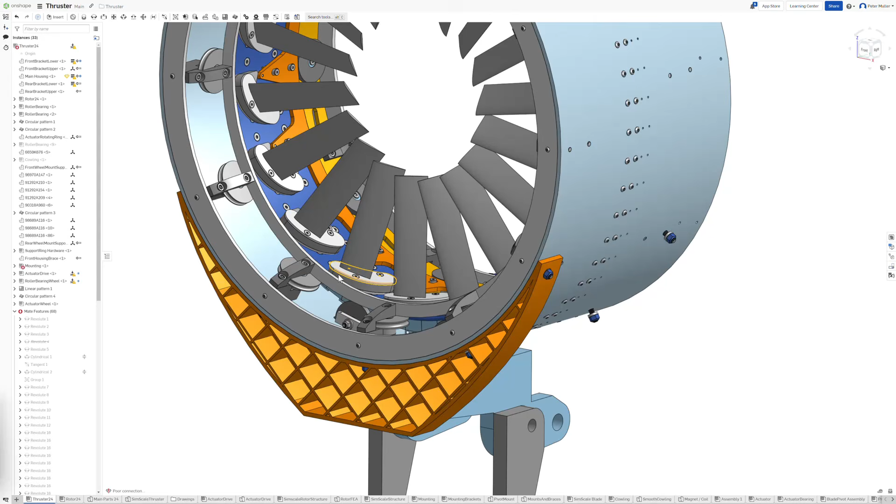This is how it looks with the cowling hidden, to give you the basics of how it works. This blue or purple part is the rotor, made of 1/4 inch thick aluminum, riding on these wheels. There's a dozen wheels around the front and 9 around the back, each with a bearing on either side, an upper one and a lower one, taking all the driving load from the rotor itself.

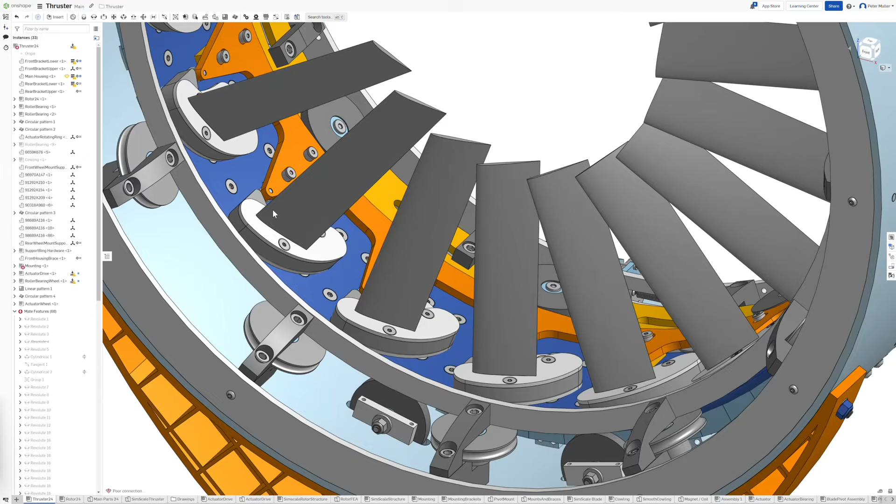Mounted to the rotor, each of the blades has a bracket it sits on, and they can pivot on that, which I'll show you in a minute. On the back side, there are other wheels that the rotor runs on, and also other fittings or brackets that allow the blades to be adjusted, which I'll also show you.

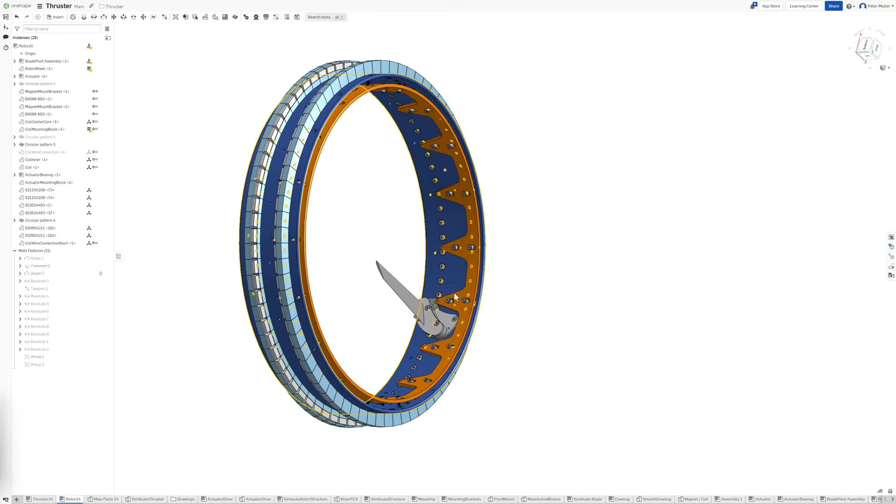So here's the rotor, and this is everything that's spinning. I've hidden most of the blades to show you this one actuating. But before that, on the outside, you'll see the way I designed this, and this may not be ideal since I didn't know a lot at the time about the best way to configure an electric motor.

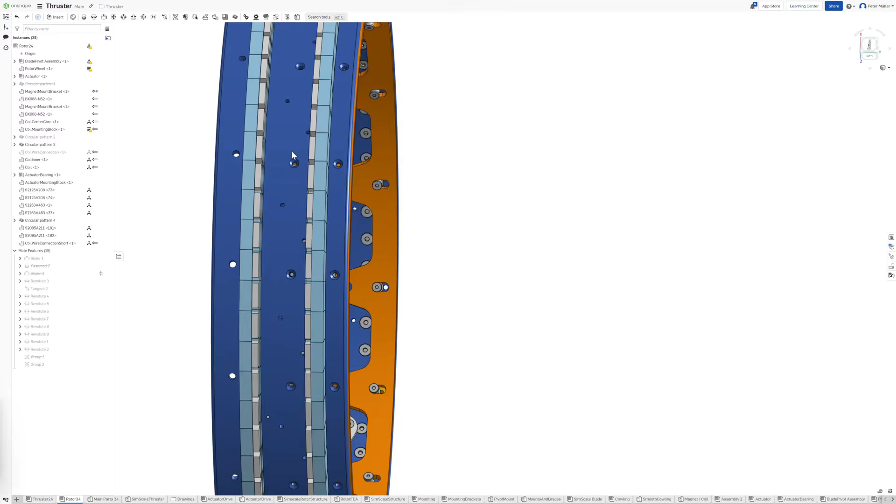These are all the magnets, alternating north-south facing inwards, with 72 on either side, so 144 magnets total. The blue thing is the bracket, and the silver one is the actual magnet itself, and the coils run in between that.

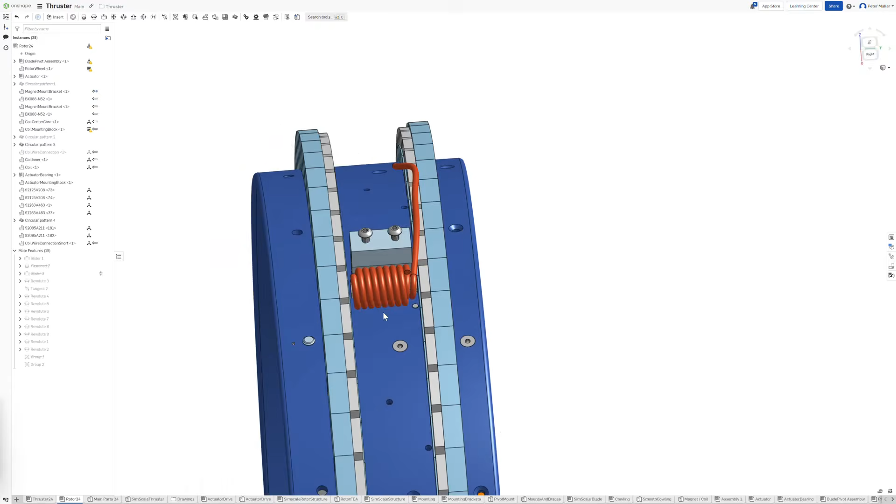Just to give you an idea, here's one of the coils with the bracket that mounts it to the housing, which doesn't rotate, it just sits still in the housing. There's a tight clearance there, and a little soft iron core for the electromagnet. It's just a 3-phase motor setup, with every third one being on the same phase.

So how the blade actuation works for the pitch adjustment: you'll see this orange bracket here which is running on bronze bearings, so it can slide. When it slides forwards like this, it actuates the blade, and when you slide it backwards it comes back.

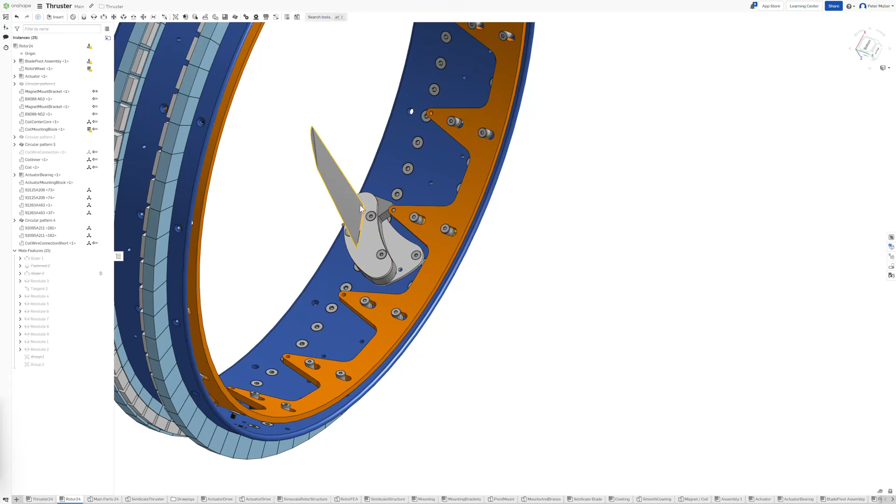Normally the blade rotates on a bearing, quite a large flat bearing underneath here, in line with the leading edge of the blade, so it rotates around the leading edge. There's a little roller bearing on the back to allow this to roll on that flat surface.

So again, if I actuate this, you'll see that's how we get the blades to move. To actuate them you're pushing pressure here, but it's the aerodynamic force on the blade when it's running that's going to pull it back to the flat pitch.

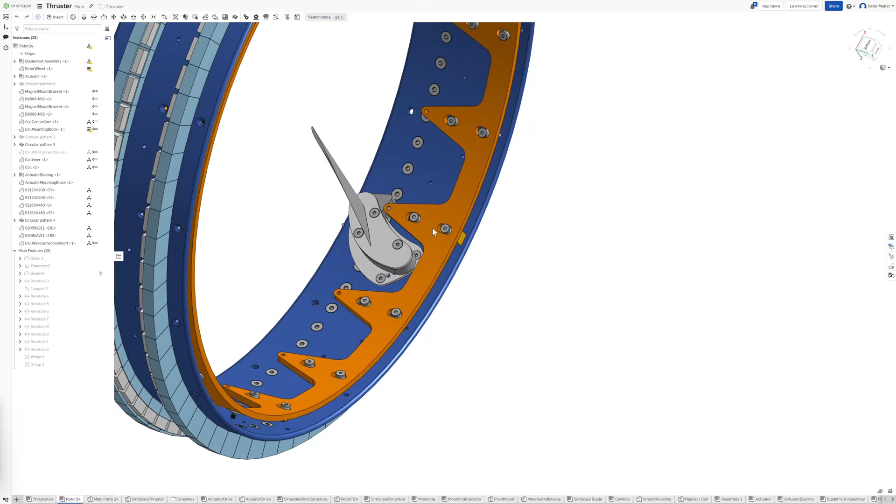So this is just to hold it in place. When you let go of this, it'll want to flatten out just because of the aerodynamic force on it and where the center of pivot is on the leading edge there. I've got 25 degrees of adjustment in there right now.

And then this orange thing here is actuated by this other ring that's on the main housing, and I'll go back and show you that here shortly.

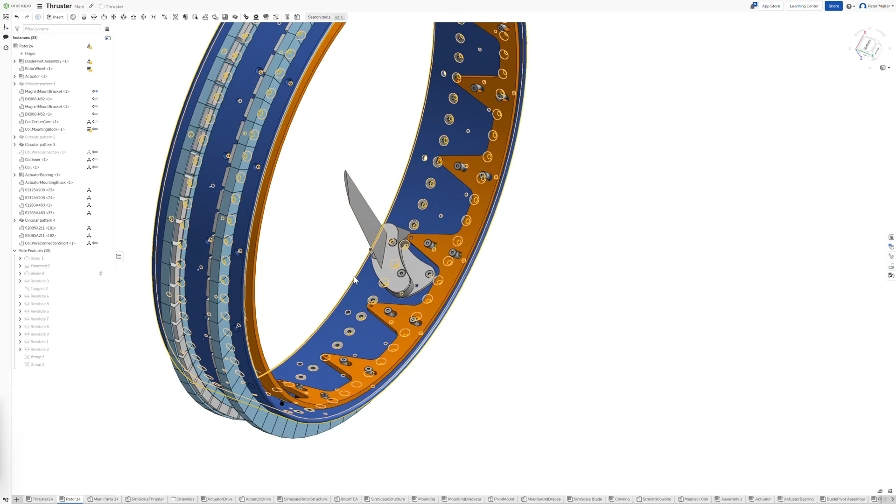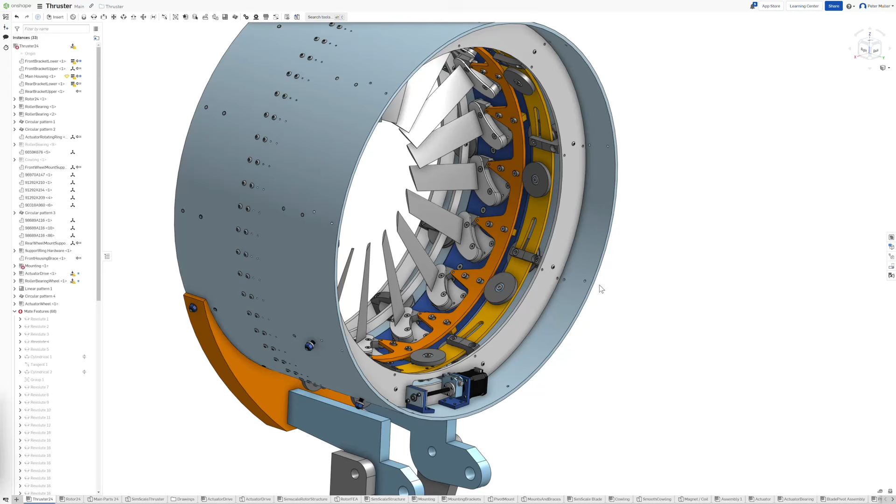Something you may have picked up already is that given the coils and magnets are on the outer side of the whole rotor, they have quite a long arm length from the center of rotation, about 13 inches of radius. So the torque available will be really quite high on this setup because of that arm length, and because an electric motor has a lot of torque by its own nature. So that's definitely a plus.

Let me show you how the blades get actuated here. You have this other outer ring, basically slotted, and the slots run on an angle. It has wheels on it with a flat edge, and they ride up against the flat edge of this orange one here.

So while that rotor is spinning, these wheels are turning and running against the orange one. In order to get that orange bracket on the rotor to push forward, this one just rotates. If I move it, you'll see as it rotates, it moves forward.

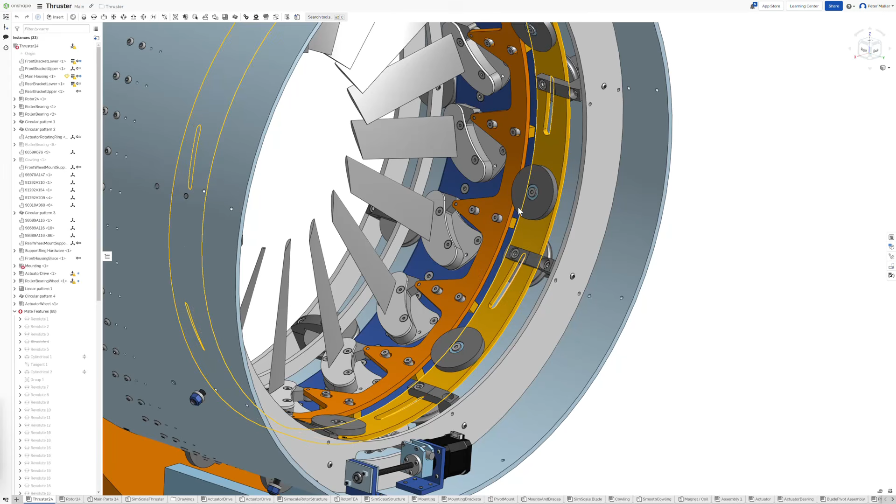Because of the way I've got the animation set up, it's not pushing the orange bracket right now, but you can see how the wheels are overlapping now where it would be. If I move it back, you'll see how it comes back again. So that's how that works in order to get the blades to change pitch.

In order to actuate that, right now for the design I just have a lead screw in here, and that pushes along, controlled by a regular stepper motor. That runs this rod, pushes it along, and that rod is hard fixed to the light orange-yellow one there, which allows it to rotate.

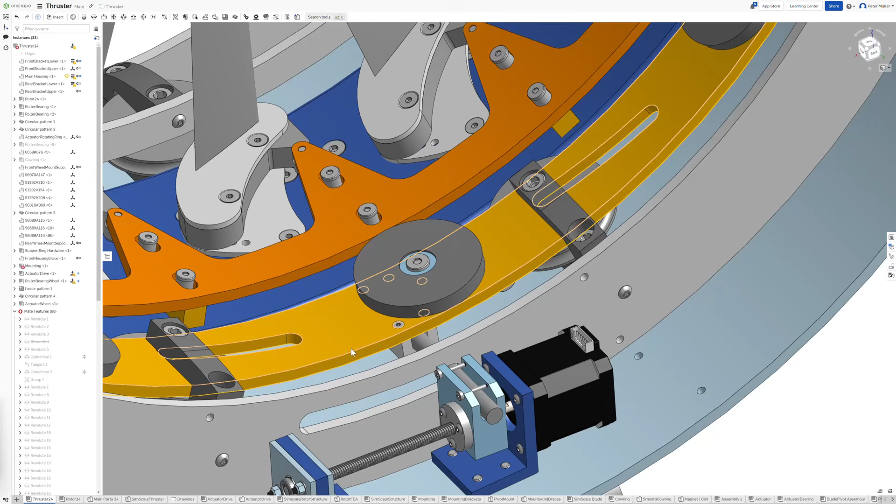So that's how you get the pitch adjustment. The pitch adjustment on the blades would be fully automated and just controlled electronically.

It would work in that if the motor is spinning too quickly with not enough load, it would basically coarsen up the blades to add more pitch. If it's struggling or laboring under whatever it's trying to do, it would flatten them out again, very much the same way as a governor works on a constant speed propeller. So that's how that system all sets up.

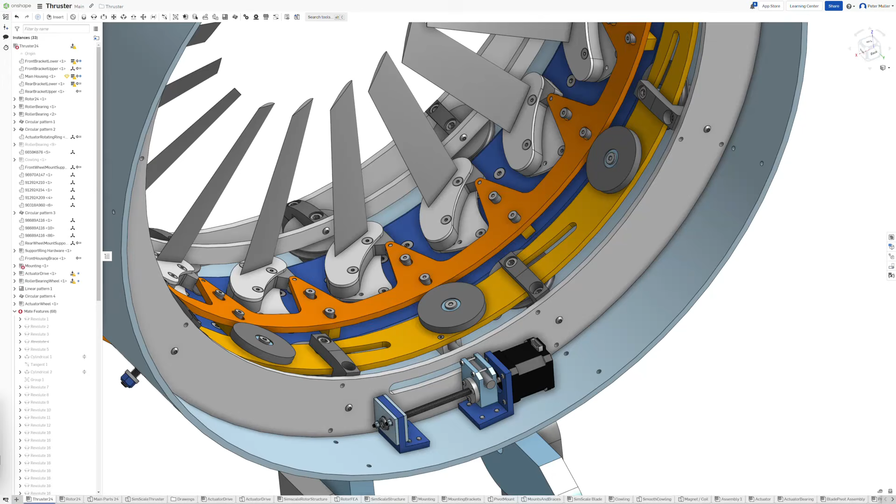So unlike regular ducted fan motors that exist, because this has variable pitch blades, it's not going to have the same problem of running out of steam at fast incoming air speeds or fast cruising speeds. The blades can adjust further, and if needed we could actually take this beyond 25 degrees, but I think that'll probably be enough.

Let me tell you some of the other advantages of this design. Having the blades mounted on the outside of the rotor gives you the advantage that nothing is under tension, everything is under compression. So when those blades are spinning, they're all wanting to be pushed down into the rotor. It's unlikely that one of them is going to come loose or come free because of that, which is an advantage.

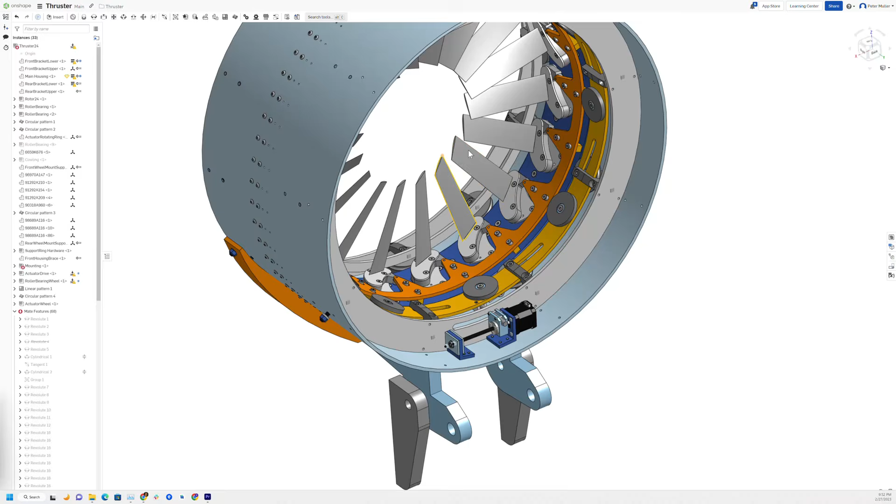The advantage of this system, as I mentioned earlier, over a turbofan is that you can adjust the blade angle. On a turbofan, the blade pitches are set for their maximum cruise, and you don't have that ability to adjust them dynamically. We also don't need to be concerned with blade tip speeds, because the tips are so close to the center, they're not moving very fast at all.

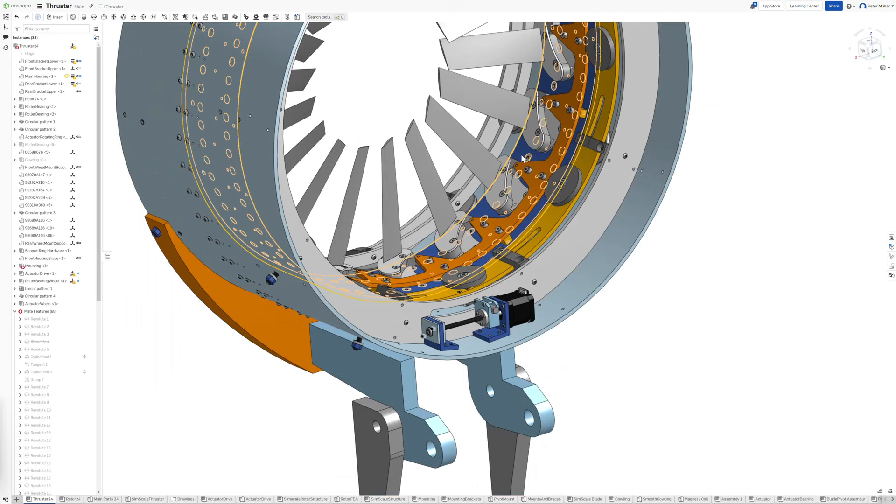And that's why, as I said earlier, this thing is designed to run at 5,600 RPM. If you could get bearings that are inside those wheels there that the rotors are running on to handle the faster speeds, you'd be able to run this thing up to like 8,000 RPM. Of course, there'd be a lot more loads and stuff, and the FEA that I did for the prototype was all done for 5,600 RPM.

When I did all the CFD modeling and stuff, I actually took this up and ran some CFD simulations all the way up to a 96-inch diameter, and I'll give you some numbers on that a little bit later. But yeah, as you can see, there's no reason why this wouldn't scale up to a much larger diameter.

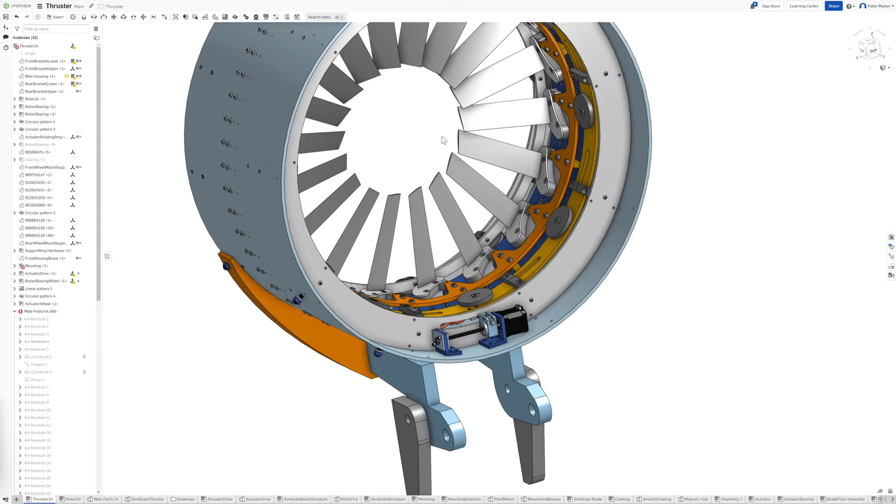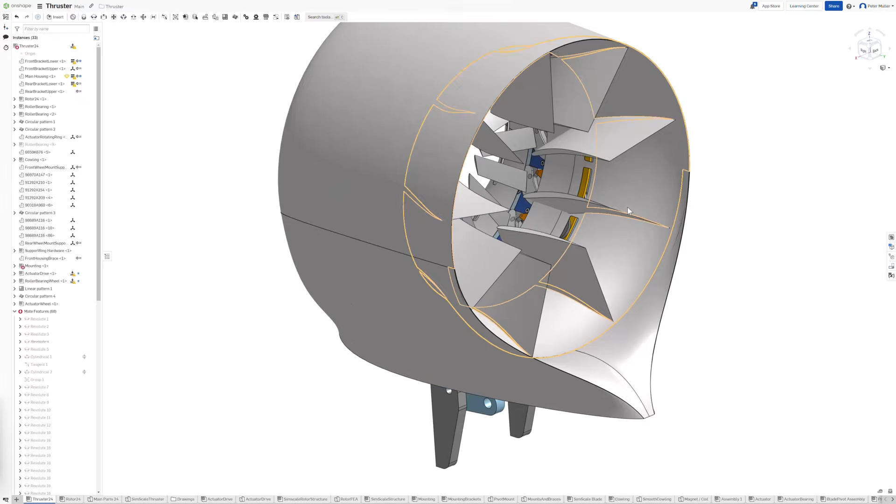With the cowling visible again, I just want to point out a couple of other things. The stator is in here. As you can see at the back, there's 9 of these stators, and their job is to take the swirling air that's coming off the back of the blades and straighten it back out again, so it comes out the back in the same angle as the direction of travel. You can see I've set them up as an airfoil, and you'll see later in the simulation that they actually generate forward thrust.

The camber of that airfoil has enough there that when the air's running over the top of it, and because it's also pitched downward relative to the direction of motion, there's a component of lift that acts in the forward direction and actually provides forward thrust for the whole thruster. They actually contribute about 15% of the total thrust, just having those in there.

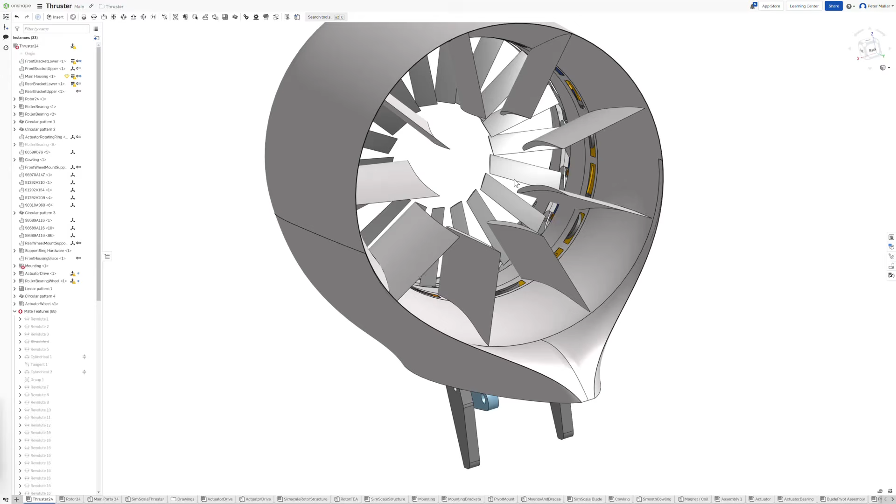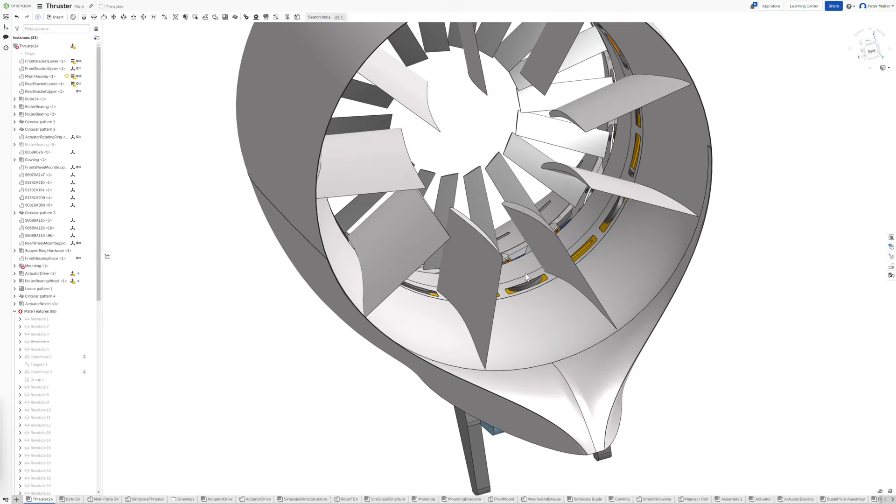I spent quite a lot of time going through different iterations of the size of those, the chord lengths, and the foil shape to match them up to what the flow was coming off there. You can also see you've got ventilation in the cowling here, and that's to allow air to run in past the coils to keep them cool. It runs in through these slots at the front, underneath the rotor past the coils, and then back out the other side. So that's how that works.

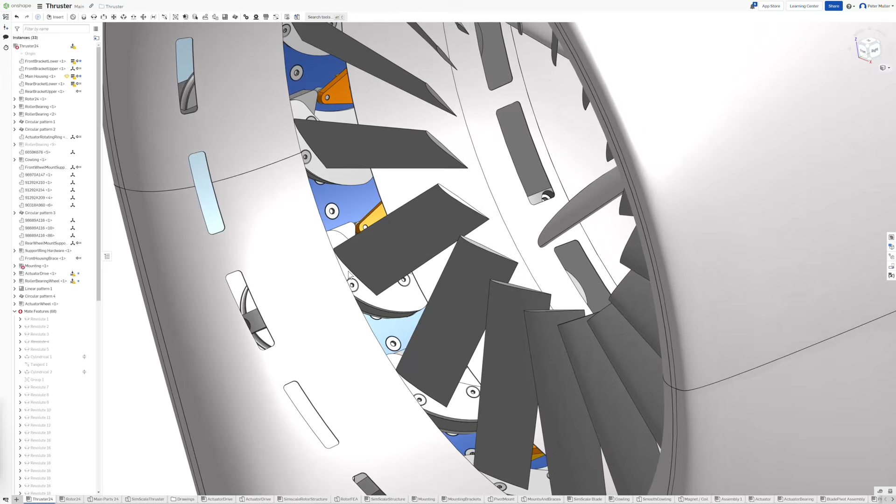One of the other advantages of this design is that if for some reason you did bend or break a blade during a trip, it would be easy enough to come in here. I've designed it so these screws all have a hex head bolt on them - you just take those 3 screws out, the blade rotates a little bit, and you can just pull it out and hot swap it with a new one. So you don't have to do a full disassembly if you've damaged a blade. It's actually like a 5-minute job to do that.

There's a couple other things I'd like to point out before we move on. One of the big advantages of this being electric is that unlike a turbofan, it's not pouring a whole bunch of waste heat out the back from burning jet fuel. So much of it just ends up getting converted into heat and blown out the back, which is such a waste of energy. So this definitely has an advantage over that setup.

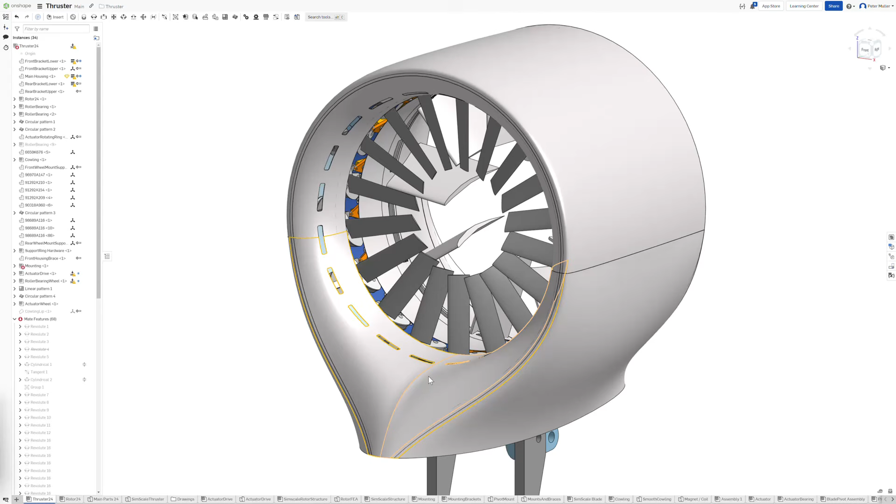Last thing I wanted to point out - anybody who's looking at this who's really astute about aerodynamics would realize that this isn't a good design for where the cowling meets up to whatever surface this is mounted to.

I ended up just trying this because it looked kind of cool. But what happened was the airflow is accelerated right in front of the lower blades, which creates a pressure differential, with a lot more pressure on the blades there than up the top.

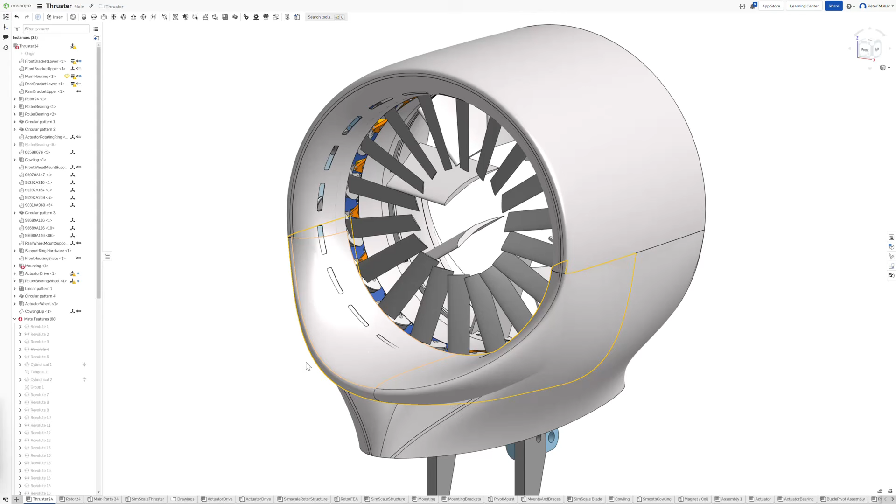So I added a lip, which hasn't been finished yet, similar to what most other turbofans have. This way the air coming in would be even pressure all the way around, and any accelerated air coming off a wing or wherever this was mounted would just go around below it. I did some CFD modeling on that, and it moves the air pretty smoothly, giving a nice even flow.

It looks kind of different, but as I said, it hasn't been blended in yet—it's just a surface I created there. So that fixes that potential issue ahead of time.

Before I show you how I did the CFD modeling in SimScale, I want to show you the model I exported out of here, which was before I did all the detailed mechanical design. So it's a much simpler model, with basically all the aerodynamic surfaces in it.

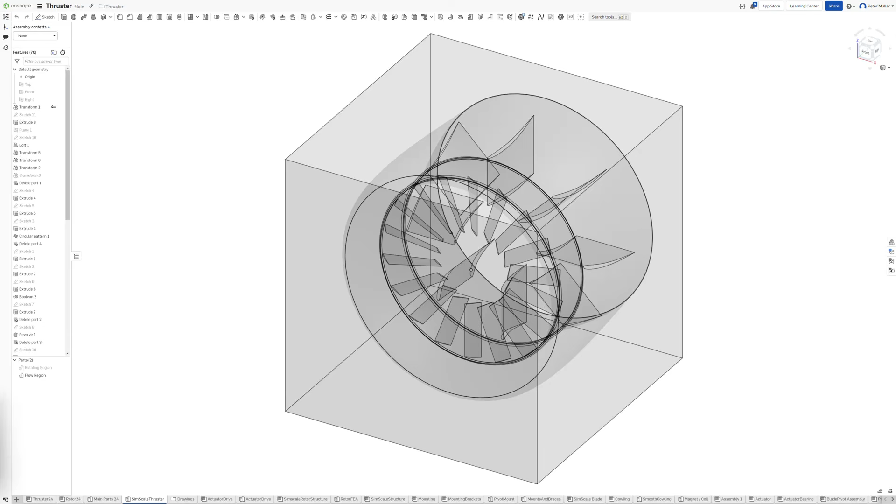I've got it translucent right now so you can see all the parts that make it up. But basically, importing into SimScale, you import a solid block that has cavities where everything is. So if I make this solid again and do a cut here, a section view, you'll be able to see how it's working.

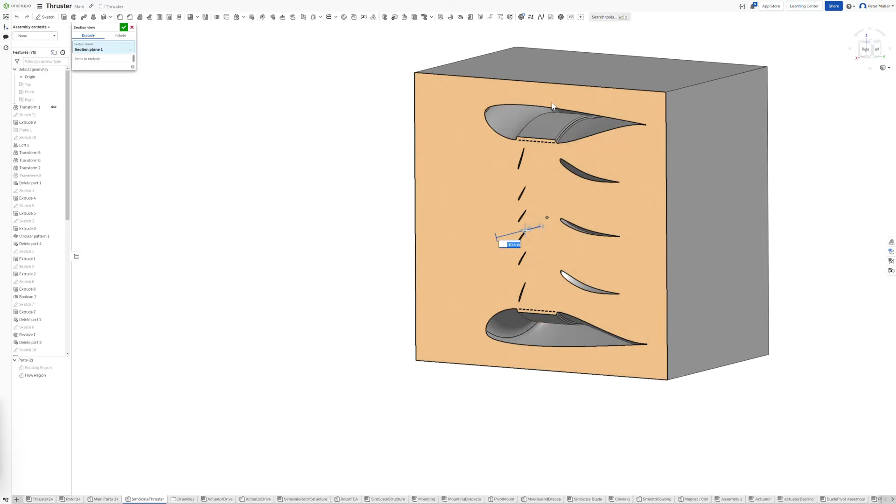Now we're looking into the inside of the cowling, and the yellow hashed area is solid material. As we go through, you can see the profile of the cowling, then the stators as they're cut, and then each of the blades as I move the cutaway all the way around the model. That's how you import it.

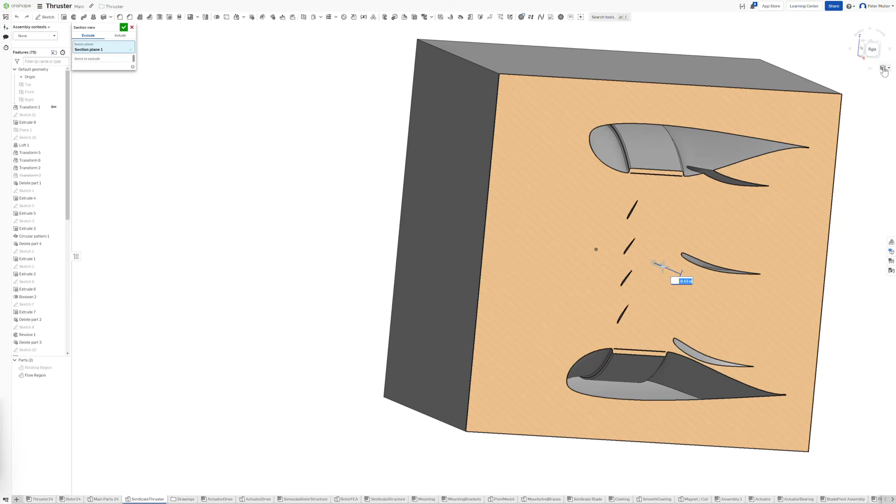There's also a section in here which is a rotating section, encompassing where the blades are moving. I did one of these for this model, and also one for a two-bladed propeller, an 82-inch blade propeller, just to get a baseline.

I'll make this model available to other people, so if they want to run their own simulations to see what results or performance they can get out of it, they're more than welcome to do that.

The first thing I did in SimScale was establish a baseline just to make sure it was giving me reasonable results. This particular model has a two-bladed propeller at 82 inches.

Unfortunately, all the simulations I ran, almost two years ago now, magically disappeared out of my SimScale account only a couple weeks ago. So I've had to rerun some of the stuff, and I haven't been able to get this propeller one to come up with exactly the same numbers as before.

But the numbers I got before were 979 pounds of thrust for 195 horsepower, with an 82-inch prop—sort of like an older 182 with a two-bladed prop, somewhere in that category.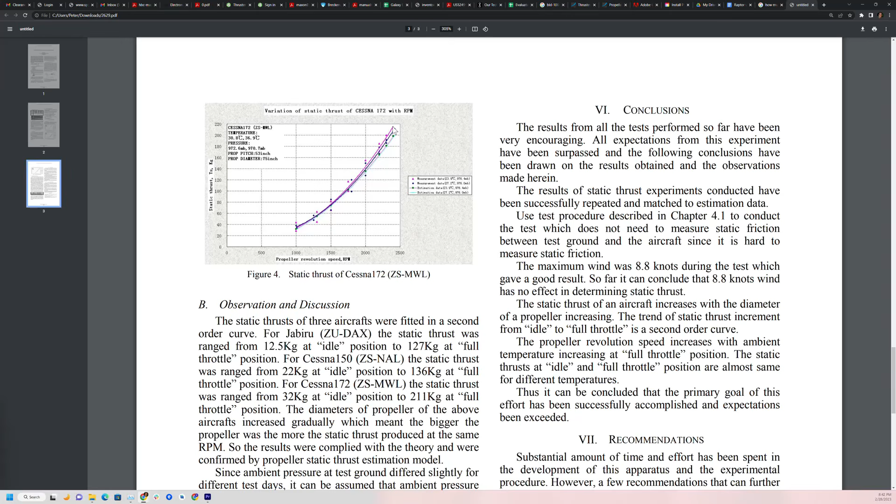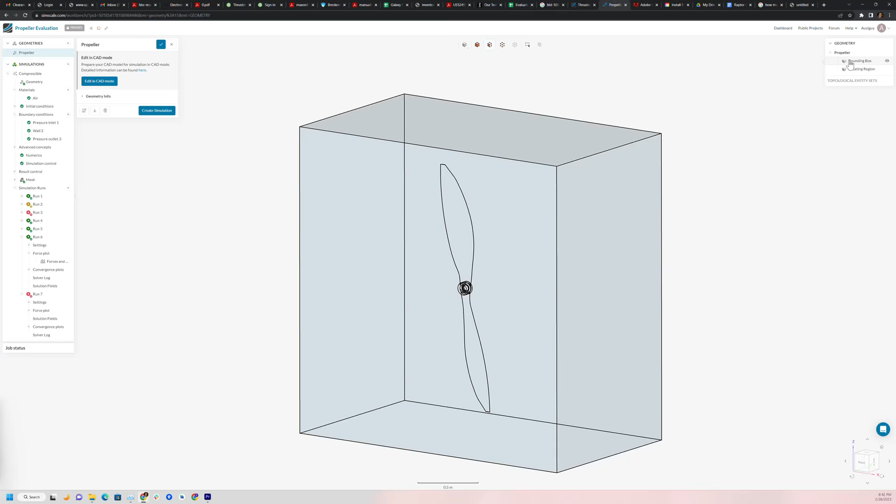When I did this propeller simulation, I was running at 2800 RPM, really pushing it. I remember when I did the Raptor, which had around 320 horsepower with a 5-bladed prop, I measured 1,000 pounds of thrust. So I think 900 pounds of thrust here at 200 horsepower is probably reasonable as a baseline.

But anyway, that's what the CFD was showing, and you can actually look at these runs here. If I show you this, you can see this black line here is the amount of force, which is the propulsion force—in other words, the air being pushed backwards. That's 3,000 newtons, and down here on this line is the torque, so that's 577 newton meters of torque. I've put all this into a spreadsheet and done all the calculations.

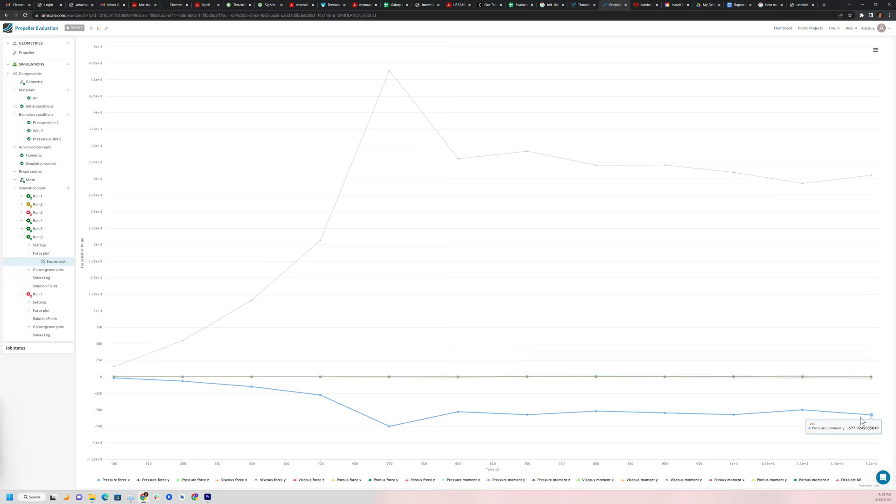I can show you a little bit up in here how I've been doing it all, basically just to do my comparison. So this is the one that I had before here, 979 for the two-bladed prop and 195 horsepower. Anyway, so let's move on and look at how I did the thruster here.

So here's the thruster model, and as you can see, like I just showed you before in Onshape, there's the rotating region in there which just encompasses where the blades are. So you import that into SimScale here, and then you go and create your simulation here.

So I'm doing a compressible simulation. I select my geometry, which is this one that we're looking at here. And then you specify what your materials are, which is basically air. You can set your initial conditions, and I really don't do much of that—I just set everything to standard.

And then you can define your pressure inlet area, and there's different ways of doing this, but I've done it with a pressure inlet on the front, a pressure outlet on the back, and then walls around the side. And that's how I'm defining the working box that everything's working in.

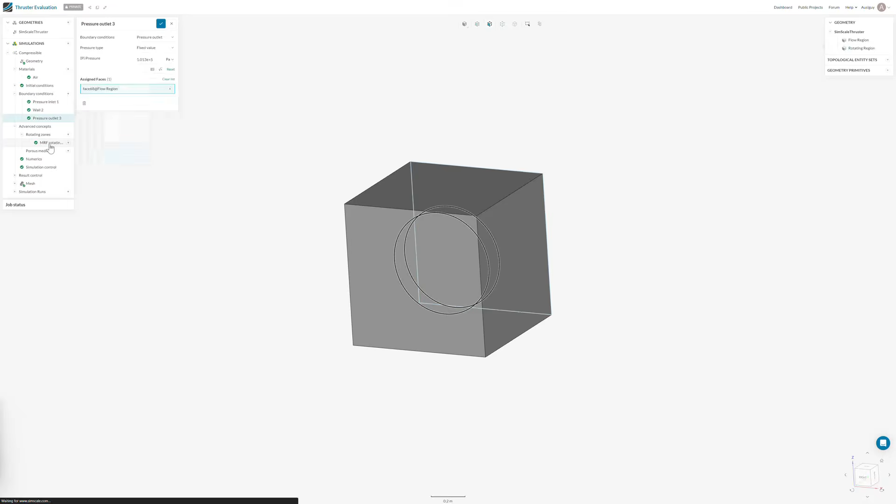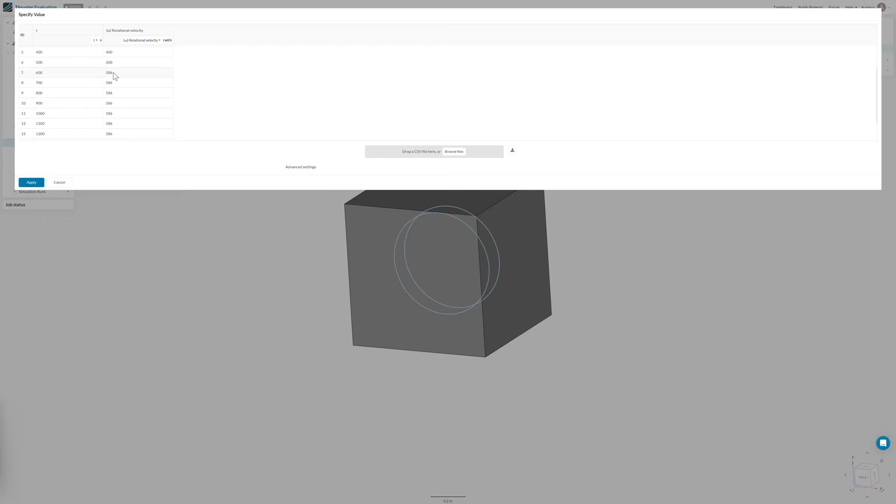And then you've got this rotating region in here which you define, which basically looks at the geometry of the blades and sets those to rotating. I've got those rotating on a scale here so that we iterate through 1500 time units, and I have it starting out at 0 radians a second, and it works up to 586 radians a second, which is 5600 RPM. So it progressively goes up to that, and then it sits there from time unit number 600 all the way through to 1500, so it can stabilize.

And then you can specify details in the simulation, how many time units and how often you write the data, the results and stuff. And then I've got in here the last thing, specifying the forces and moments on each of the blades there, the stators, and also on the housing. And you run your simulation and then you get your results out here.

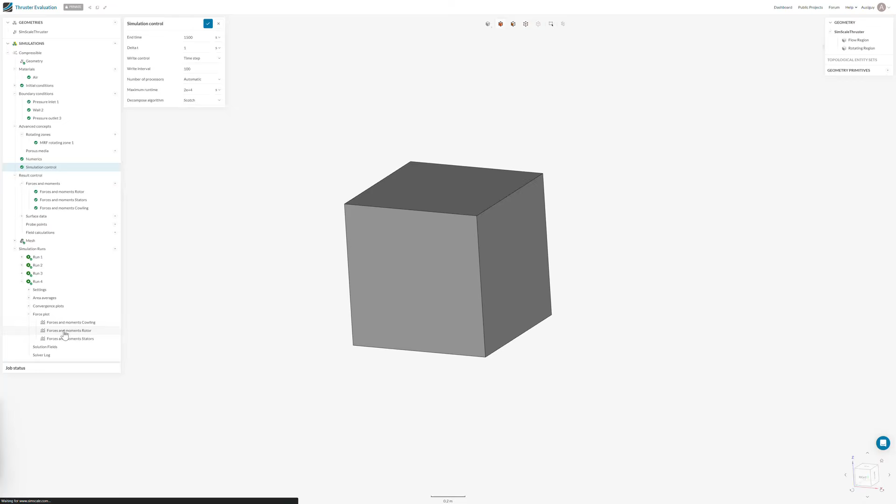So if I open up these, I can look at the force plots here. Starting out here, this would be the forces on the rotor. You see we're negative here just because of the orientation of it. So basically, as it's starting up, it's creating quite a lot of force on the blades themselves. And then once it hits the peak RPM, it sort of stabilizes there and gets to a point where it's just going to be comfortable. So we got 574 newtons there, and the torque on there was 79 newton meters.

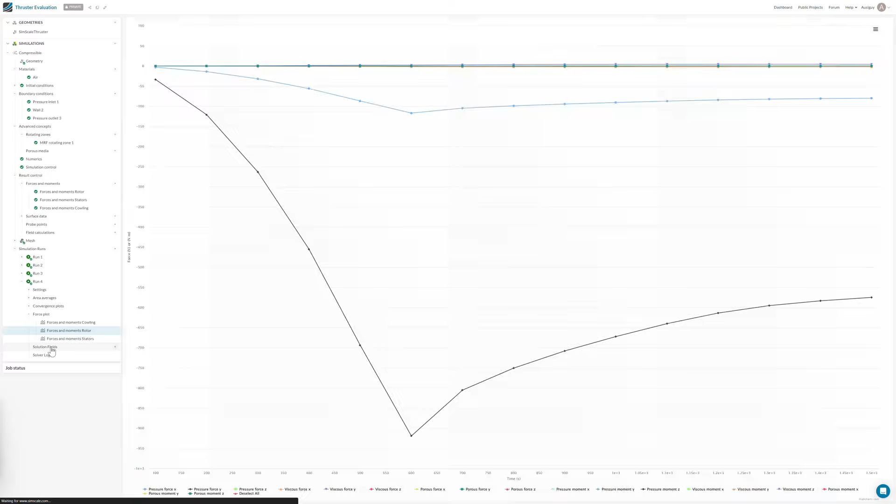So this is how I'm getting the numbers for the torque, but in order to get the numbers for how much flow there is, I look at the solution fields here. So I'll come back, let this load up, and then I'll come back and show you how it all looks.

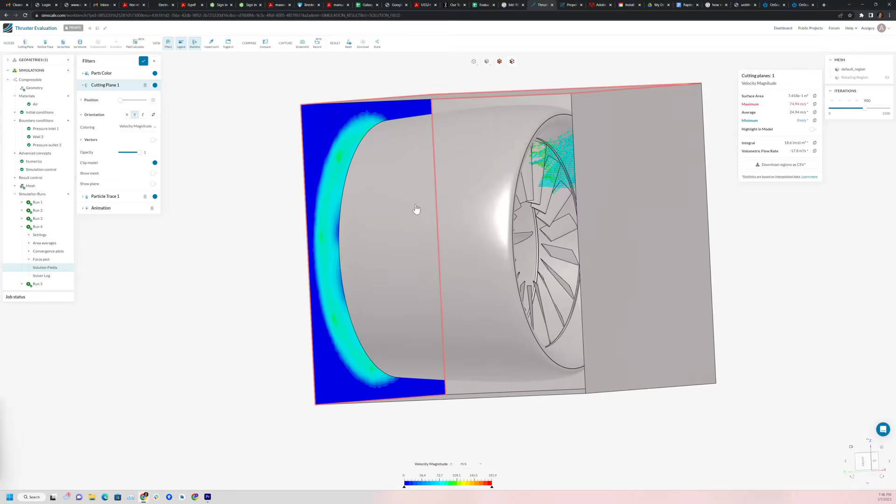So as I mentioned, I haven't been able to come up with exactly the same simulation numbers as before, but I'm pretty close—I just can't remember exactly what specific settings I had last time. When I'd originally done all this a couple of years ago, I actually ended up doing about 167, or 164, simulations on this, iterations where I was just changing one thing at a time, and if it made an improvement, I kept it, and if it didn't, I reversed it and moved on to the next aspect. So that's what gave me all the decisions on how many blades and lengths of blades, chord lengths, and all the different angles and perspectives, and things like the stators and the cowling shape. That's how I basically came to the results that I've got now.

So looking at this now, this is basically the box that we're in, and I've got the front side of it hidden, or the front wall hidden, so you can see in there. I'm going to change it a little bit in a second so you can see more about what's going on. But I wanted to show you how on the back side here, I've got this one face selected.

Over here I can get what the volumetric flow rate is, so 17.8 cubic meters per second, and I've got that put in my spreadsheet. This is a new run here, 17.8. Before, when I did it, I had 18.6, not far off, but that 18.6 was 114 newton meters of torque, and now I'm only at 79 newton meters of torque.

This is the amount of pressure that's on the blades. I have a feeling that because of the way this works with the entrainment, with the hole in the middle, you're getting a free ride with a lot of the air going through the middle there. It doesn't have to actually touch the blades, so you're not putting force and pressure against them, but you are getting flow rate because of it, since it acts like a drain with the entrainment effect. Anyway, the numbers come fairly close here.

I had 1575 pounds of thrust before for 90 horsepower. If you compare that to what I had on the two-bladed prop, 979 pounds with 195 horsepower, and take those two ratios, one over the other times one over the other, you end up with this number. So the performance on the thruster is about 3.5 times what it is for the two-bladed propeller in terms of how much thrust it does for how much horsepower or torque is required, given that the RPMs are a lot higher.

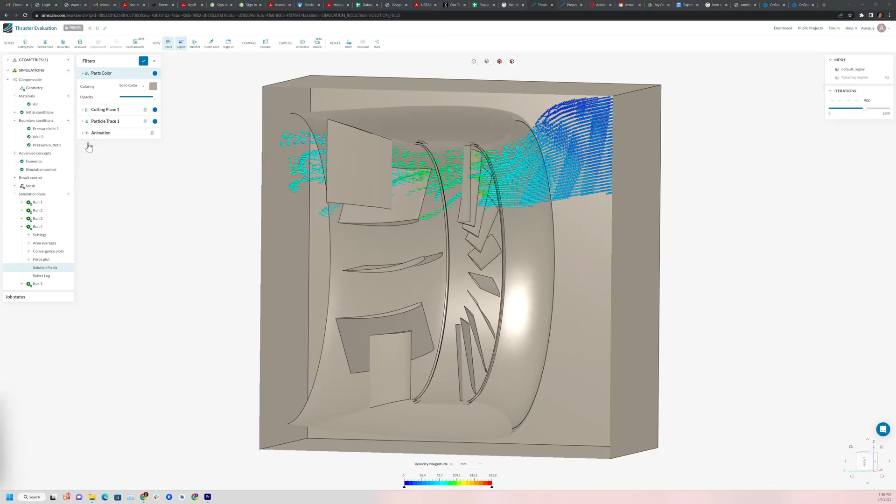So let me show you this animation here. This is basically particles, and I've got them starting out in this one section of the front of the box here, and then they're just running through, showing you the velocity of the flow running through the thruster.

So you can see they're coming in, and the way I've got that face set up is just pressure input, so just atmospheric pressure, and the movement here is all being instigated by the suction effect of the thruster. So that air would normally be moving at 0 when it starts out.

In fact, you can go and change this back to the starting point of the simulation at 0, and we should see that update. So there's the flow just starting out as it's starting to work up to the first speed. That's at 0 when we haven't even got any speed yet.

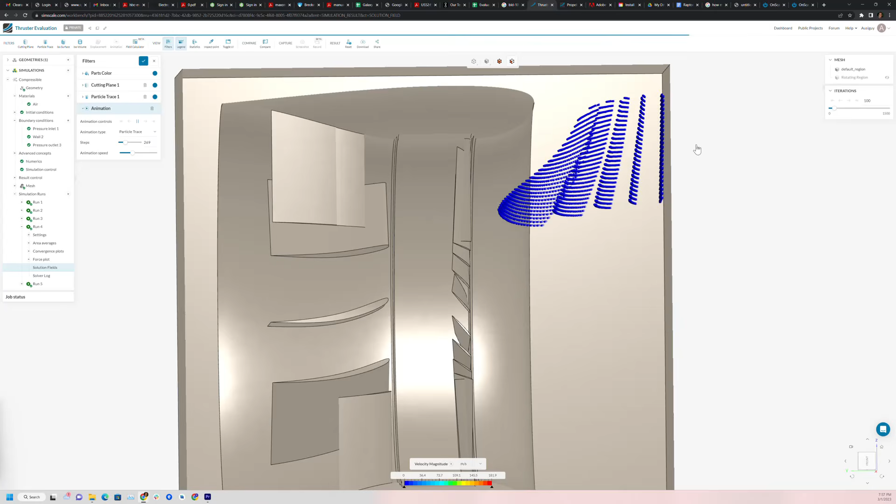We go to the first time unit, the first 100 time units, when we're starting to get up to speed, so that's 100 radians a second, and once that loads, you'll see that start to move, somewhat slowly, but you get the idea. So that's at 100 radians a second.

You can see it. Obviously, the blades don't move in this simulation, but when all the calculations are happening, they're taking that into account that they're moving. That's what that rotating region is for.

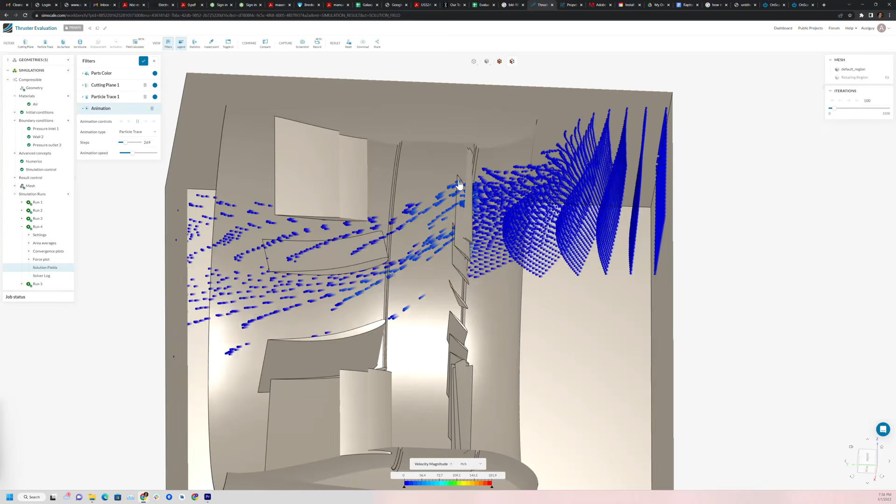You can see how the air hitting the blades is being turned backwards, or rotating around in the direction the blades are traveling. So we've got a half cutaway now. The blades would be going around in this direction, anti-clockwise, and so the flow coming off of those has a diagonal direction across that flat surface, and now the job of the stators is to straighten that out.

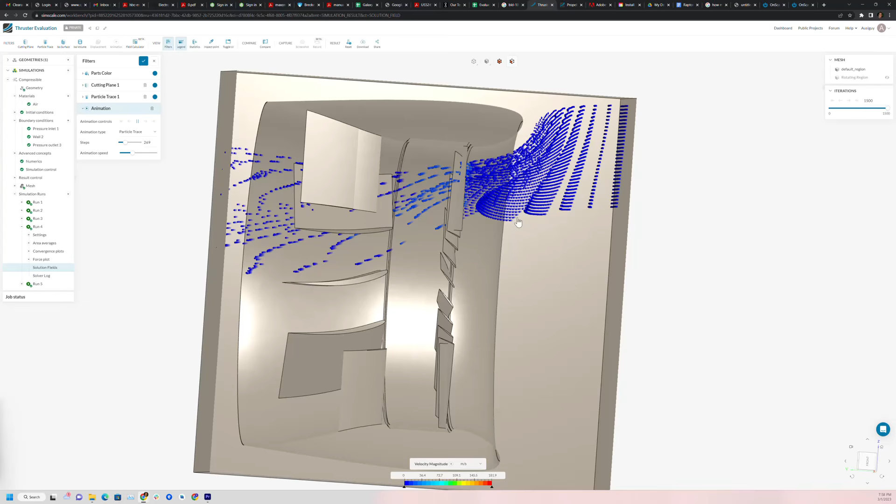So they're not doing very much when it's going slow like this, but if I bring the speed up, you'll see how it changes. We'll go up to basically, once it's all stabilized at the very end, 1500 time units, and you'll see the extra speed and velocity on the airflow.

And of course the color changes depending on the speed or velocity, so lighter colors means faster velocity. Loading that up, here we go. So now you can see already that the air is moving a lot quicker just because of the color.

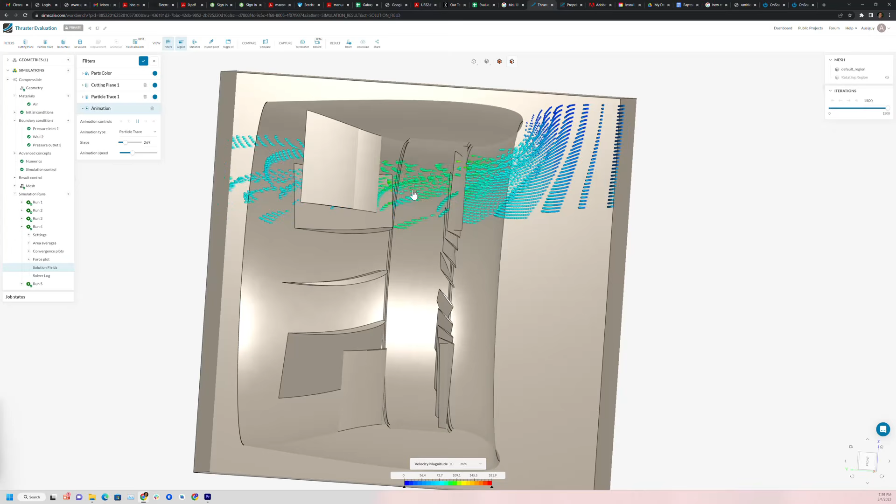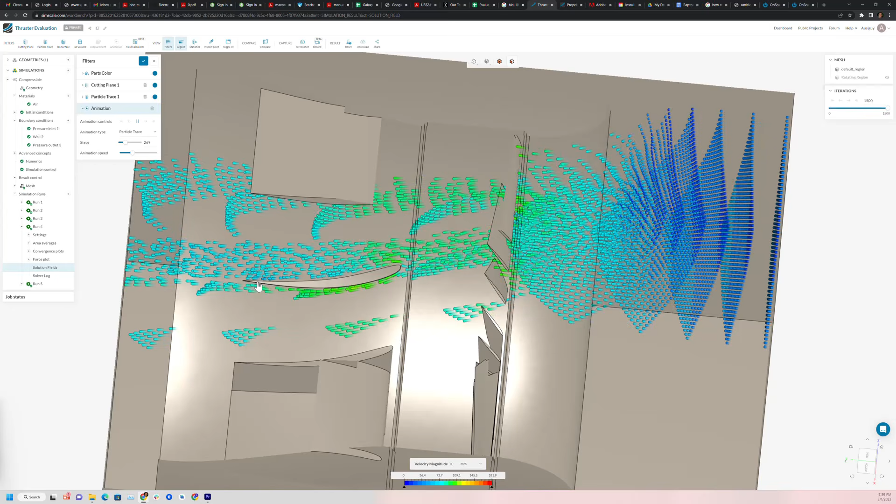And the light green color there is the fastest speed moving through there. Now if I tilt this so you can catch how that stator looks, you can see the air is hitting the stator at pretty good speed, and it's actually accelerating across that curved surface, the curved surface of the stator, so it's faster around there than it is on the other side. So I've got the angles on those pretty good, possibly have a little bit more angle, maybe a little more clockwise from what the camera is right now, but you get the idea.

So I did lots and lots of iterations like this just to make sure everything was smooth and there weren't any eddies in there or anything like that.

And of course, you can look at this just by looking at a cutting plane here and see what it's doing at any given point. So if we just cut it at the midway point here, this will show you the colors based upon the velocities again. So this is going through the blades, and this is just at the halfway point there.

And you can also turn on these vectors that show you what the flow is like. The bigger the arrows are, the faster the flow is. Also, the arrows go in and out of that cutting plane, so the ones that are poking out right now, you can just see them a little bit. It means it's coming backwards towards the camera, and if you just see the trails of them, then it means it's going in the other direction.

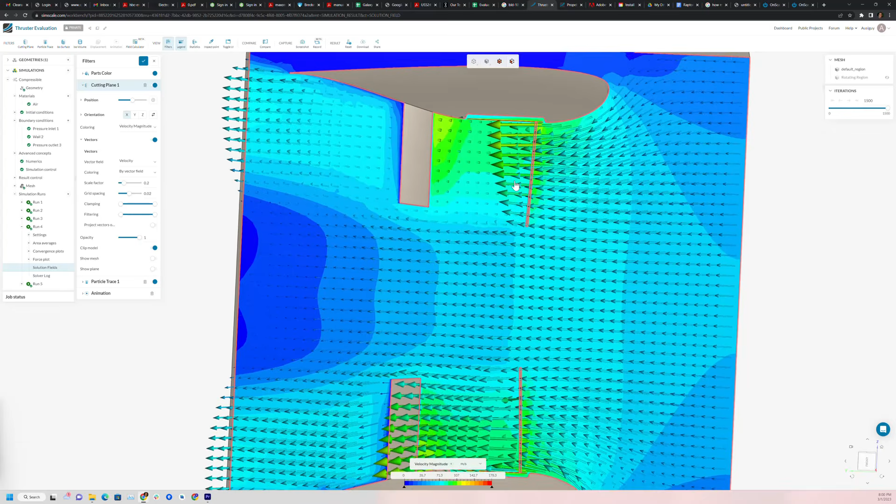So you can see the stator is having an effect on that one, making it turn back inwards again. Anyway, so you can see the flow going on there, very much the same as what a turbofan is, but the advantages that we have here.

And I haven't even done any real work with adjusting the blade angles, I've just got them in the flat pitch position. I did do some original simulations at 150 knots of oncoming airspeed, like on an airplane doing 150 knots indicated, and I did change the blade angles a little bit to compensate for it, and I was still getting positive thrust out of there. It wasn't like I'd run out of steam and wasn't getting any net thrust. So the blade pitch is doing what it's supposed to do, compensating for the forward motion of the whole setup.

And you can actually see the entrainment effect going on here, where the air in the middle is faster air than it is out here. So this opening in the middle is actually pulling air through, and it slows down through here, but I think a lot of it is just because there's so much acceleration coming off the blades and the stators. In the middle here, you're getting a lot more air moving through, whereas on a turbofan, there'd be a big engine section in the middle that is just stopping all that, so you're only able to move air through where all the blades are.

And as I said before, I think this area in the center isn't having to do too much work with moving the air through there. It's just nothing is really hitting anything. It's just a low pressure out the back here and a high pressure out the front here, and it's just pushing it through or pulling it through.

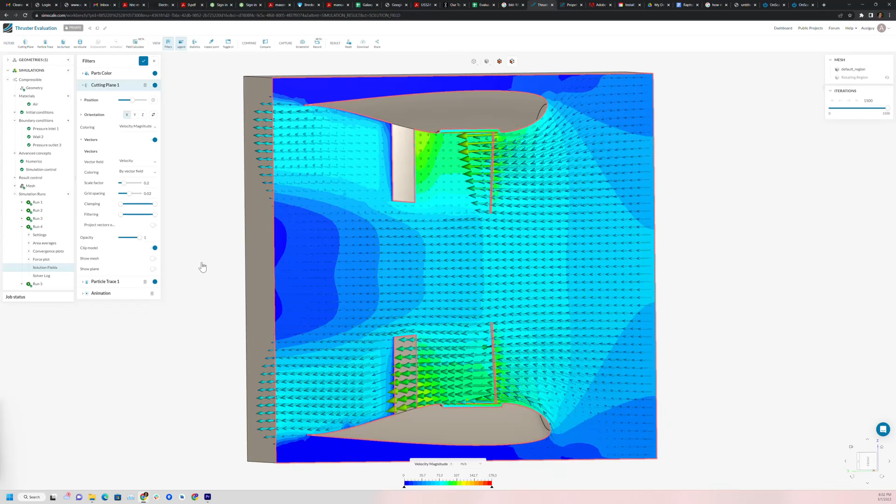So anyway, I think that pretty much covers everything. I'll think if there's anything more to show you about on the simulations here.

All right, so I did want to take a couple of minutes here just to give you the backstory on how I was going through these simulations when I was first doing them.

When I started out, the model I came up with was pretty rough, and when I ran the first simulations on it, because of all the geometry, it was actually worse than the two-bladed propeller. I started out at only about 80% the efficiency of the two-bladed propeller. Then of course I started tweaking and changing everything, one iteration after another, and it didn't take me long to get to 1-to-1 with the propeller.

I just kept going, and the changes I made were small improvements all the way along. I got to 1.2, 1.3, 1.4, and ultimately to 2 times the efficiency of the propeller. There was never a big change that made a huge difference—it was always sort of iterations.

So I was fairly confident that what I was doing was accurate, and I hadn't made any crazy, stupid mistake in the simulation that would give me some wildly inaccurate numbers. I started making more changes, adding the twist in the blades was one of the last things I did, along with the stators and all the modifications around getting those right, and everything made more and more of an improvement.

When I got to 3 times what the propeller was, I was starting to say, well, this is really a big deal. Now this could make a major difference, because if you're 3 times the efficiency of a propeller-based engine, what are you compared to the efficiency of a turbofan engine, which is burning tons of fuel and throwing lots of waste heat out the back?

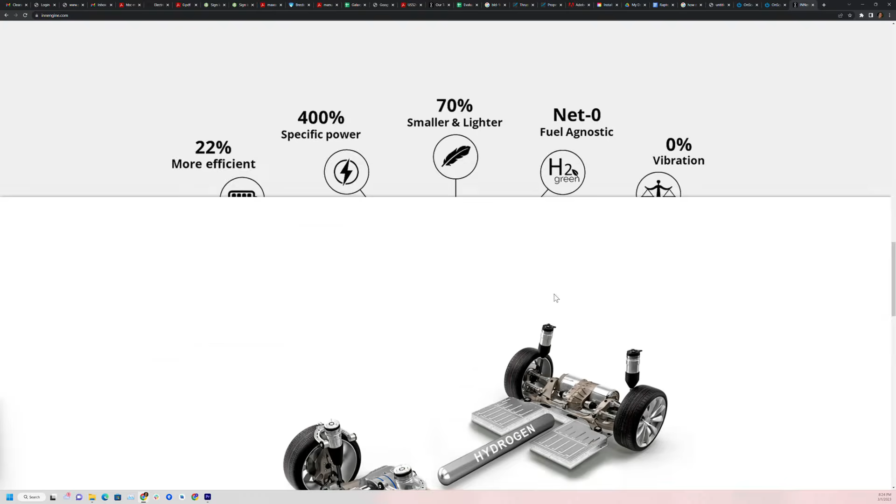And they have a mock-up on the back for a generator. So they're designing it for cars and that sort of stuff. You guys can do your own research on these people. You can see the simplicity of their engine - that's the parts for their engine, and that's the parts for a V8 engine over here. Big difference. They have lots of information on their website.

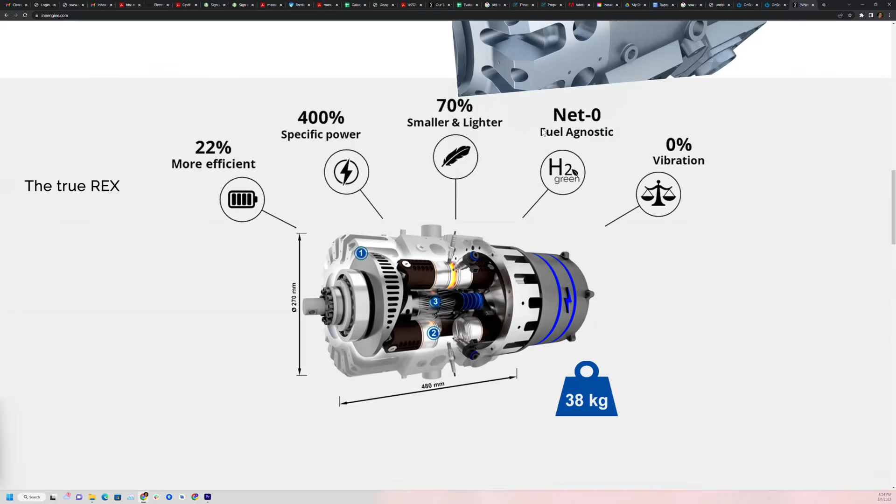But if I go and look real quick at their technology page... I think that's the one I want. Or maybe that's what I was looking at. Yeah, that's the same one. Oh, maybe not. No, here it is. So there's the two engines there.

Actually, I made a mistake. That's the Aviation engine there, purely air-cooled, and that would be ideal. If you could have something like that, air-cooled, but have it burn diesel, that would be great. It's a slightly different design - the spark plugs are in the front on this one, and on this one, the spark plugs are on the sides.

So anyway, you guys can do some research and read all about this. This little video here shows it running and shows how it works, and you'll see there.

Basically, I'll just pause that there. You can kind of see how the pistons are all running back and forth. There's not a lot of moving parts, and it's super smooth. I'm sure with a good muffler on there, you could make it super quiet. It is lightweight and puts out enough power - you could have 2 of these in an aircraft for redundancy, and each one would have plenty enough power to power one of these thrusters.

So anyway, that's kind of what I'm looking at right now as a possibility for power generation for this, but I'm open to different other ideas. If you wanted to look up this company and find out more about it, it's innengine.com. So yeah, that's about what I've got for you on the whole idea of generating electricity for this.

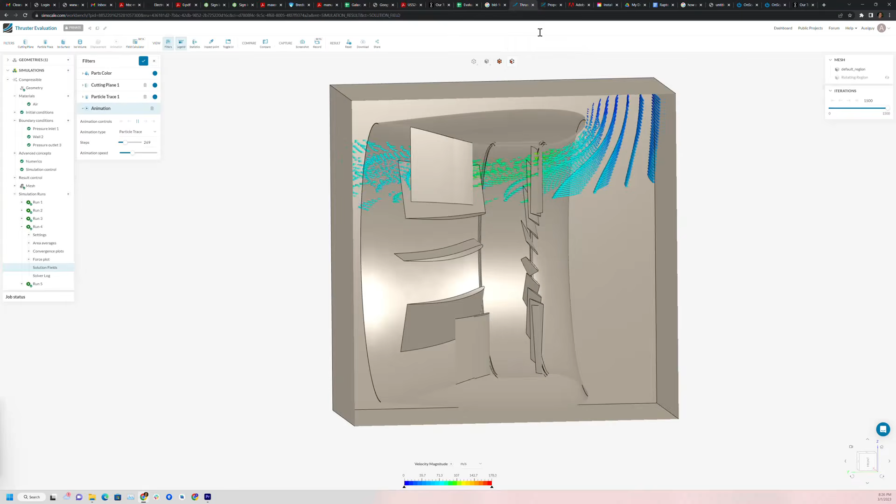All right, let me give you a few pictures of me putting this together, or at least the aftermath of it.

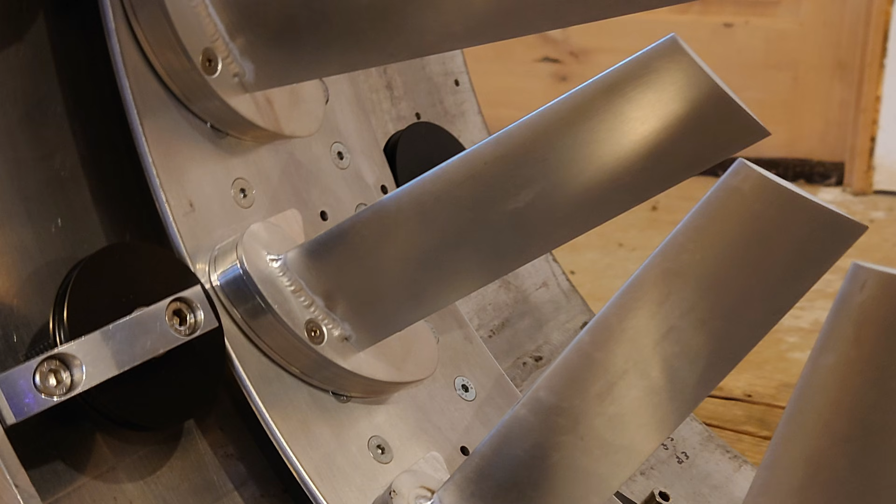So these coils that I designed and wound here end up having a really high back EMF, so it's taken a lot of voltage to run this. It's probably in need of a bit of a redesign from someone who's more of an expert at designing an electric motor. The blades came out really nicely. The shop that made the housing and the rotor did a really horrible job on everything - took 6 months and cost a lot of money, and that rotor was not even round when I got it. It was 2 inches out of diameter in one direction compared to the other, and the edge isn't even true. So it doesn't run very smooth at all, but I mean, it is a prototype.

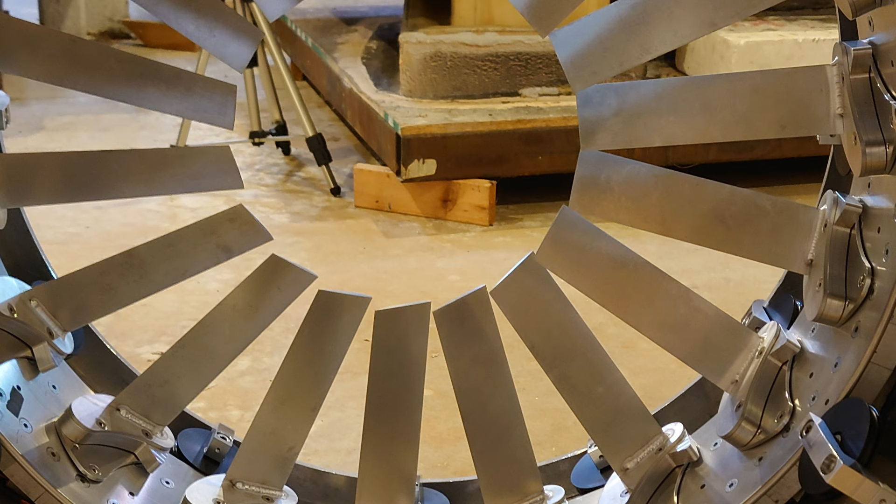I don't really want to try and run it up to more than 1,000 RPM. In order to do that, I'd have to get a lot more batteries, and I'm kind of running out of time right now. So I might just leave that up to the next person on their prototype to build and see what they come up with.

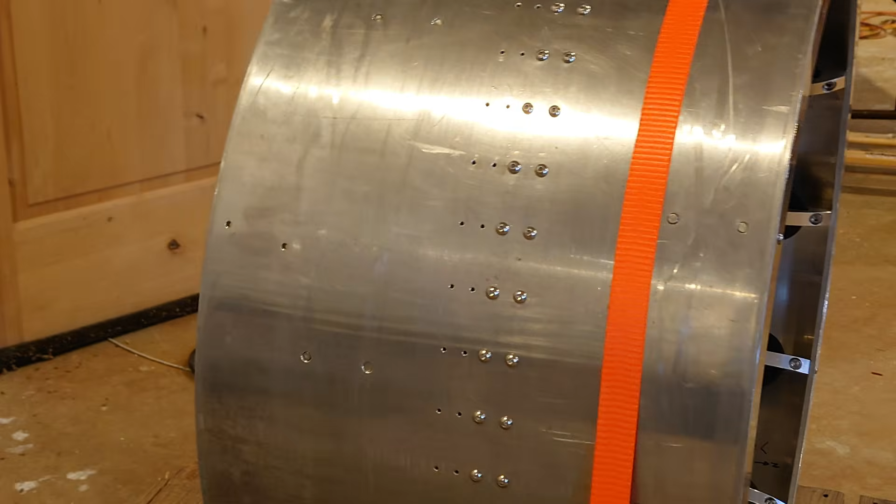But anyway, as you can see, there's all the different construction. Those black wheels are Delrin acetal material, and they actually run really smooth on the aluminum there. I don't think that'll be an issue up to high speed. When I'm running it at 100 RPM, nothing gets hot on there.

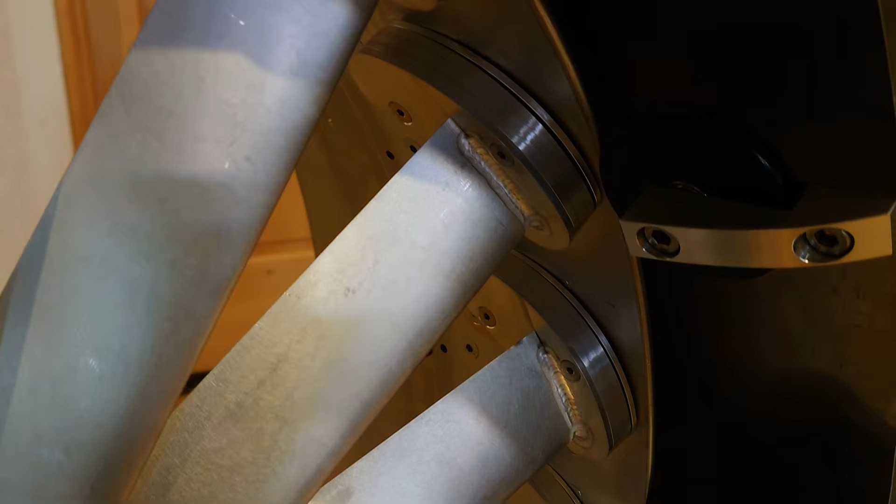It's all quite smooth and doesn't really have any issues. Unfortunately, the control that I have right now doesn't allow me to do much with it. One of the problems is that it has so many poles in it—72 magnets, 144 altogether. It needs a controller that can run at a high frequency, and the one I have can do that, but it just needs a lot more power right now.

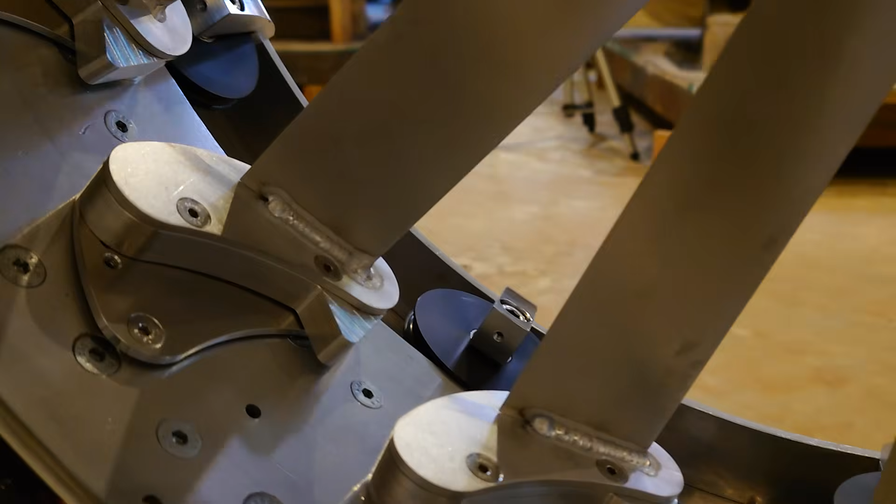So I'm kind of stuck with it as it is for the prototype right now. And obviously I haven't gone to the trouble yet of doing anything with the blades and the automatic pitch adjustment in there. Those are all bolted in place so they can't rotate. I purposely designed it so I'd be able to do that without having to get all the fancy stuff in there.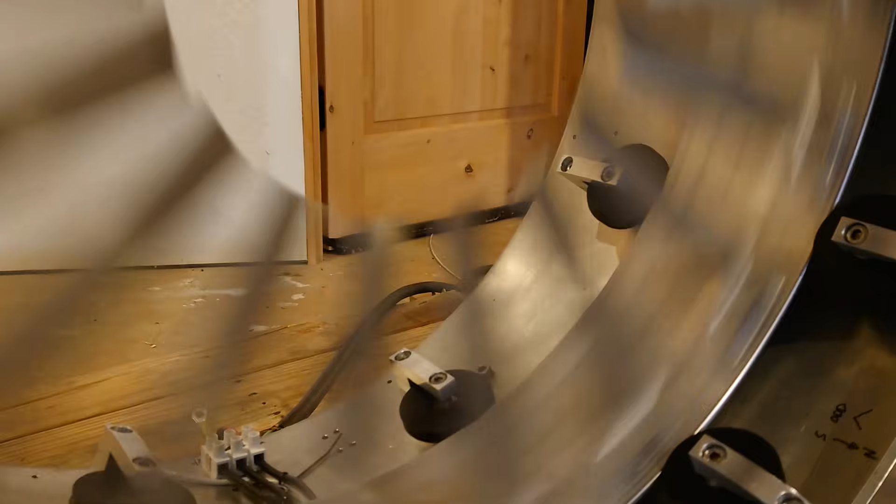As you can see, it runs fairly smooth for what it is. This is only at 100 RPM, and of course at 100 RPM, because thrust is proportional to the square of the speed, it's not putting out much air right now. You can stand behind it and feel the air flowing, but it's not really a lot.

But you could imagine at 5,600 RPM, it's a crazy amount of thrust coming out of there. So if somebody could design the electric coils better on this thing, I think it would be a good working solution.

Okay, so what's next for this? Well, I've already filed the patent, and it's apparently going to be public on March 9th. It won't be approved yet, but the patent office says it will be public by then. I'll paste the link in the description of this video once it becomes available. I'll actually show you some of the paperwork from it here shortly.

But I think it's time for this to be made open to other people, so other companies who might be building these—any company building electric motors, or probably the turbofan companies—they might be interested in this, or they might say, oh no, this is no good for our business, it's going to destroy our turbofan business. Anyway, we'll have to wait and see.

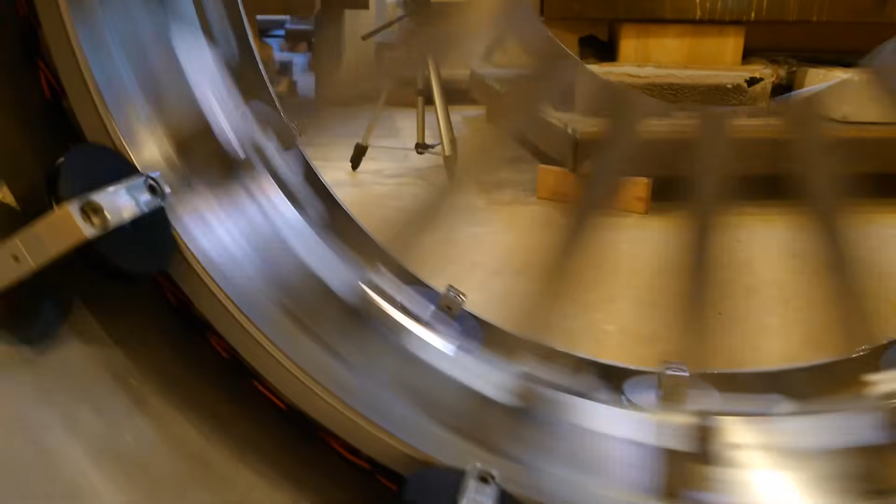And then once the patent gets approved, when and if that happens, I'd be open to licensing this. But this can scale up to the airlines, and as I said before, I had one of these scaled up to 96 inches, and it was putting out 100,000 pounds of thrust—equivalent to a big turbofan that's on a Boeing or Airbus right now.

So it could make a huge difference, and a lot of these eVTOL companies doing air taxis may want to look at this as a propulsion system, given that it can be so much more efficient than open propellers. It could potentially give existing aircraft 3 times the range they currently have. And with respect to the turbofan industry, that's a $100 billion industry a year building turbofans for airliners, so that's a big market this could potentially disrupt.

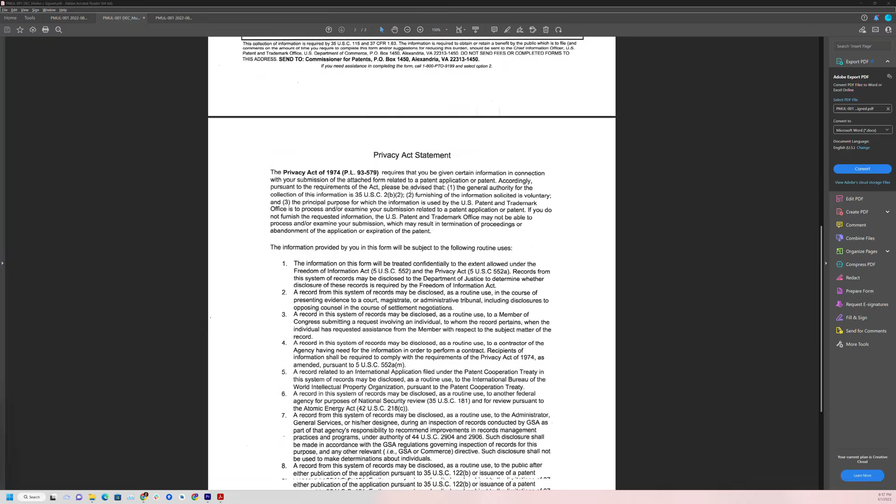So let's have a quick look at the patent. All right, so here's the patent—at least this is the filing receipt for the actual filing that was done. I've had reputable patent attorneys in San Francisco do this for me. So that's basically that, and here is the filing. I'll go back up to the top here.

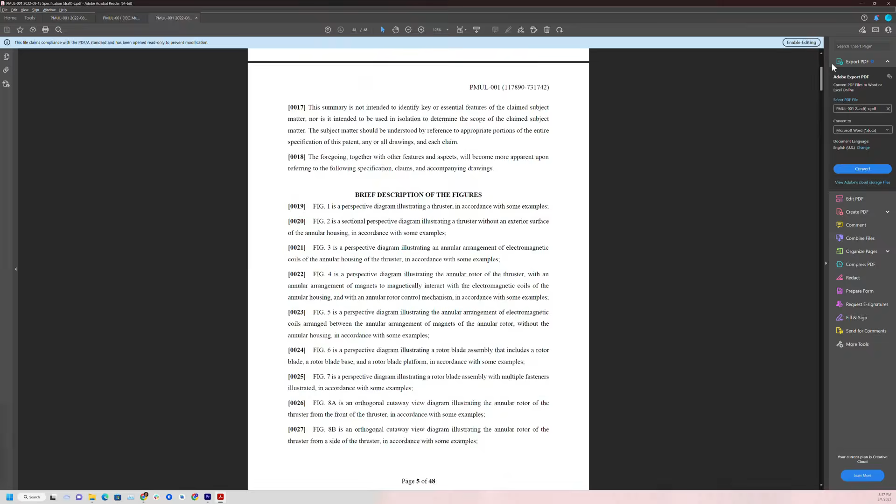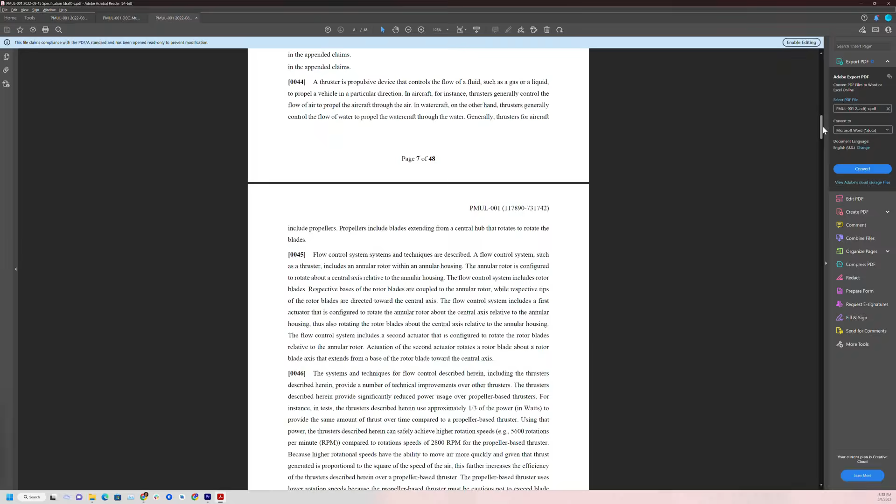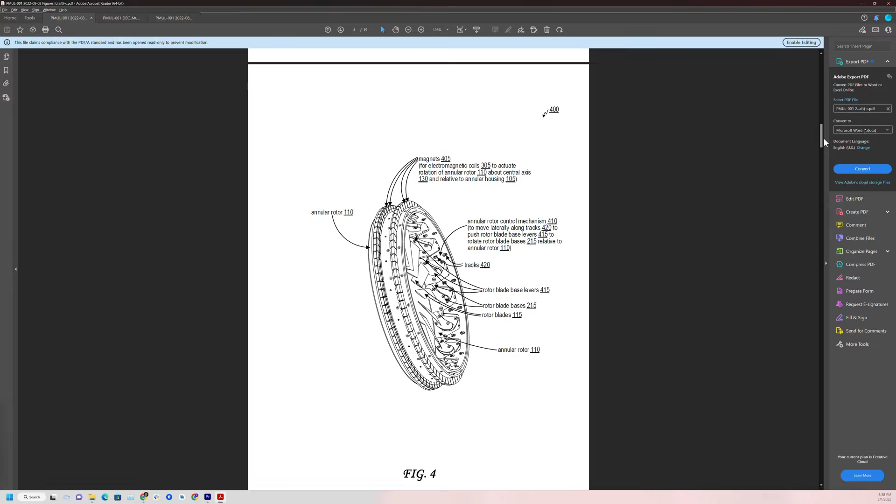So there's a lot of pages and a lot of words and a lot of details about all the different aspects of how this works and what all the claims are. I've also filed the PCT for the option for international patents with the participating countries in that program. And then lastly there's all the diagrams and figures that show the different aspects of it, and this actually came out really nice. I've got all the details in there about how the various aspects of the design work.

So anyway, you guys will be able to see that when it's online, at least from what I've been told. It shows all the details about how the blades rotate, the bearings, and all that sort of stuff I talked about, plus the actuator. So you guys can look through all that at your own leisure when it becomes available.

So let's move on and let me talk a little bit about a potential application for this thruster that I'm most interested and excited about.

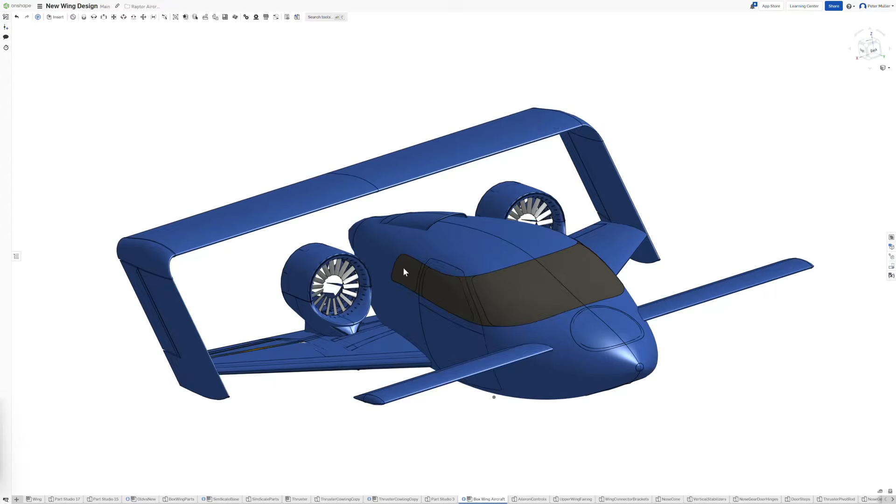I'm not going to spend a lot of time on this because I'm going to do a whole separate video that I'll link in the description. A lot of you watching have obviously seen this aircraft before, but last time it didn't have a thruster here, it had a center section, because I didn't want you guys to see what I was working on yet. That was the big secret thing I'd been working on all this time.

But anyway, we've got a pretty capable aircraft with this setup, because two of these with 1,500 pounds of thrust each gives 3,000 pounds of thrust. And with this aircraft, I'm hoping to talk an automaker into building it on a production line out of aluminum, in quantities of maybe 30,000 a year, trying to get the price between maybe 100 and 120 thousand.

I think there's a lot of money to be made for the company that does that, because this is actually much simpler to build than an SUV would be. But anyway, there's some cool stuff you guys haven't seen yet.

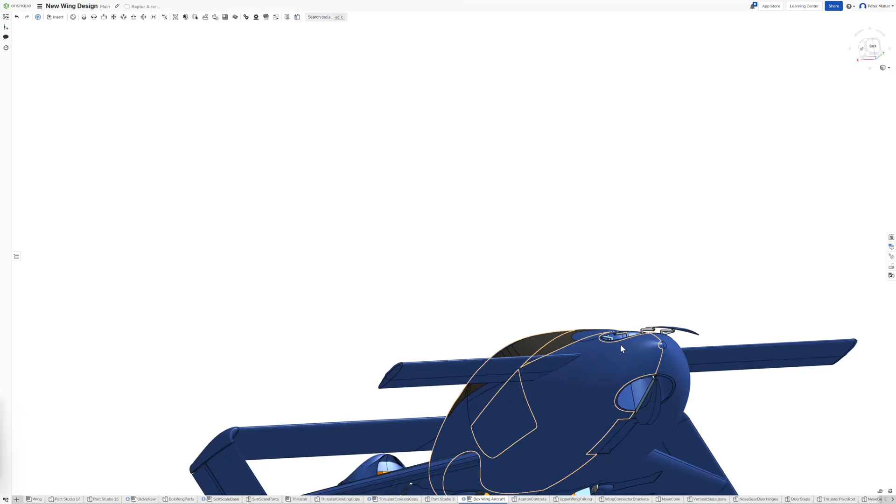For those who have seen this aircraft, if we do this, and we do this—let's see if I can make it work—and we do this, we now have the option to have a full VTOL aircraft.

So we can transition into vertical hover for takeoff and landing, and still end up basically doing 300 knots true airspeed on probably as little as maybe 11 gallons an hour because of the efficiency of the thrusters. With three thrusters, one on each of three corners, you have 4,500 pounds of lift. So a 2,500 pound aircraft would have about a 2,000 pound useful load. Obviously take away fuel from there, but the fuel burn would be a lot lower anyway because of how fast you're going. Most trips, the savings is all in what these thrusters can give us.

So yeah, I think if we can talk an automaker into building these in large numbers, we can turn these into air taxis—at least half of them air taxis and half for private ownership—and really create something that's pretty special. Anyway, I'm going to link this in another video so you can get all the details and watch that separately.

So anyway, let's see, what else do I have for you? I don't think there's too much more.

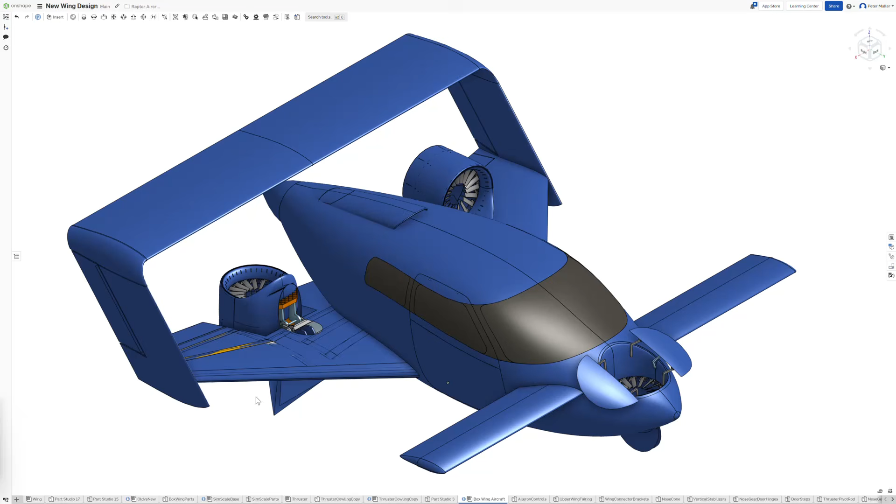All right, so indulge me for a minute while we do some calculations to compare this thruster to a large turbofan. The one I've picked is the GE9X. Here's how I'm doing this: started with the thruster at 24-inch diameter, and we're scaling it up by 4 times in every direction, X, Y, and Z. So we end up with a 96-inch diameter, and then the 3-dimensional scale factor—meaning the weight, the thrust, the fuel consumption, everything—would be the scale factor of 4 to the power of 3, so that's 64 times.

So if we take the thrust at 24 inches, 1,575 pounds, and multiply that by 64, we end up with 100,000 pounds of thrust. And if we compare that to the GE9X, that's 110,000 pounds, so it's in a similar ballpark.

It's a fairly decent comparison, and the GE9X has a diameter of 134 inches, so it's quite a lot larger in diameter. The weight from the Onshape model, the projected weight on the thruster, is 175 pounds. Scaled up times 64, that's 11,200 pounds, and the weight on the GE9X is 21,000 pounds.

So it's almost half the weight, or slightly more than half. The thrust to weight ratio is 9 for the thruster, and obviously 9 for the larger scaled one as well. The thrust to weight ratio of the GE9X is 5.18.

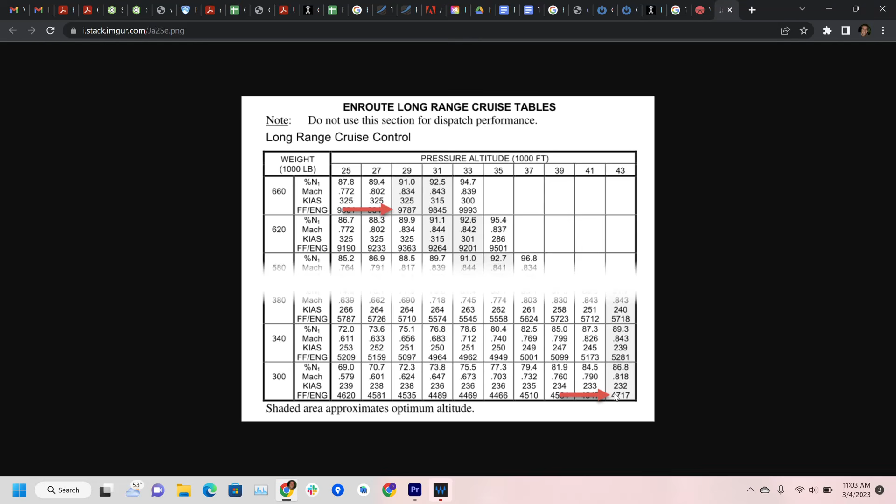So working that number in, I've said 90% of a GE90, which I've also read is around 1.2 kilograms per second of fuel. That works out to 3,960 kilograms an hour, which is 8,712 pounds per hour. Again, this is max power.

So that's 1,300 gallons per hour, divided by 6.7. The estimate for the small thruster would be 5 gallons an hour for how much horsepower it produces, and so the larger one would be 320. The performance gain there would be 4 times the efficiency, which is crazy insane.

Looking at some cruise numbers, as I said before, you end up with 4,244 pounds per hour for the GE9X. Again, just total estimates here - I can't guarantee any accuracy on these - which is 633 gallons per hour. So the performance improvement there would be 3.3.

Looking at the capacity of the Boeing 777, this is on the 300 version. It has 171,000 litres, which is 45,000 gallons. That would give it a cruise range of 35 hours, which seems like a lot, but maybe that's what it is. It's very hard to find information on this.

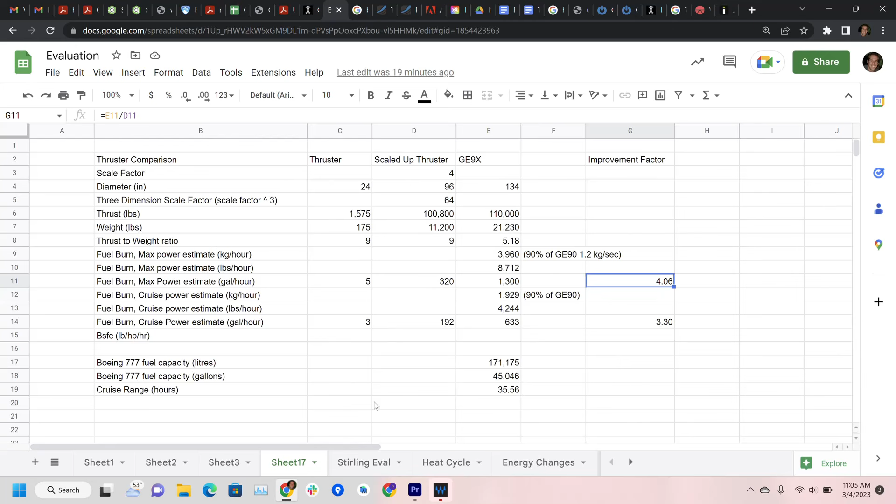So anyway, again, these are just numbers. If someone else wants to run them, I'm more than happy to see what you come up with. I would be really interested to see someone else's calculations on this.